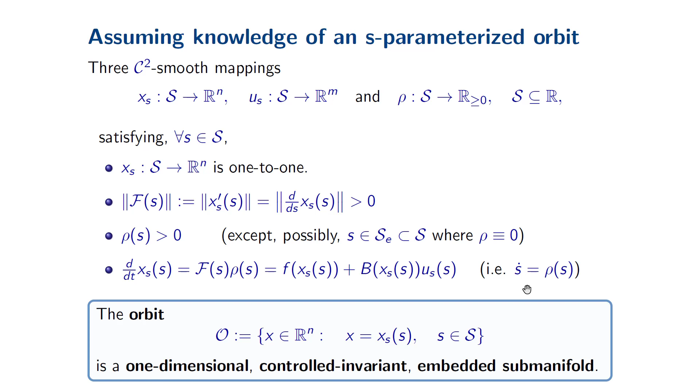Now to just go a bit heavy on the jargon here, this means that this orbit, which is traced out by the curve X sub S, is a one-dimensional controlled invariant embedded submanifold, in general at least. So if we have an equilibrium point, for instance, then it would be zero-dimensional, and it's also possible to have slightly higher dimensional attractors. But for the purpose of the thesis, we mostly just consider one-dimensional types of orbits.

Now the task we will now consider is essentially to generate some forward invariant tubular neighborhood around the orbit in question. So if we have our orbit in black here, we want to generate by feedback this blue shaded region, which is forward invariant, which means that any solution of the system entering into it will remain within it. And preferably we also want to ensure that all such solutions contract to the orbit at a given rate. So exponential is the general case in the thesis.

Now the reason we only consider generating such a tubular neighborhood, so not a huge neighborhood giving a very large region of attraction, is mainly due to the task we are looking to solve. So if you remember from the last video, we had a look at a backflip, for instance, so I'm not claiming that I have solved that problem, but for such tasks, generally having a large region of attraction, something like global stability, does not really make sense. Local is the best one can do.

And if you want to enlarge the state space, it's probably better to add more trajectories filling it out, each with its local controller, generating such tubular neighborhoods.

Now the nice thing with that requirement is that since we know an orbit, we know that this corresponds to some nominal motion of the system, which is consistent with dynamics, does not violate kinematic constraints, go beyond actuator saturations, does not collide, and so forth. Then if we remain within this tube, then we should most likely not violate these constraints either. So having these local controllers, ensuring that the states remain within them, is essentially the perfect way of solving the problem we are looking to solve.

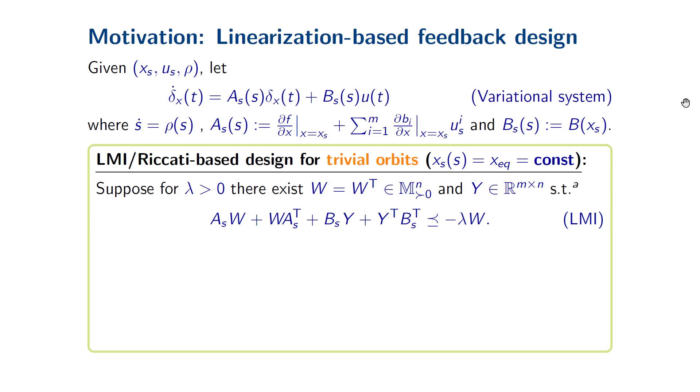E is just the difference between your current state and the equilibrium point, and K is defined from the solution of the LMI. And this feedback for the nonlinear system would render your trivial orbits or equilibrium point exponentially stable. And from it, you can construct a local but strict Lyapunov function for the equilibrium points or the trivial orbits. Now, of course, these are only local results, but they are quite a general procedure which is applicable for a large class of nonlinear systems, and which can provide a seed to utilize other types of methods. You can utilize it to construct a conservative, perhaps, estimate of the region of attraction and so on and so forth.

But this is equilibrium points. What about more non-trivial orbits? What about periodic orbits, for instance? Can we utilize similar techniques? So for one, if we linearize about a periodic orbit, then this would be a linear time-varying system. And to stabilize its zero solution, we would naturally need a time-varying feedback, and this would violate the orbital stabilization problem. And in fact, it also turns out that if we have generated beforehand a feedback which exponentially orbitally stabilizes this periodic solution we want to stabilize, then this variational system's zero solution will not be asymptotically stable.

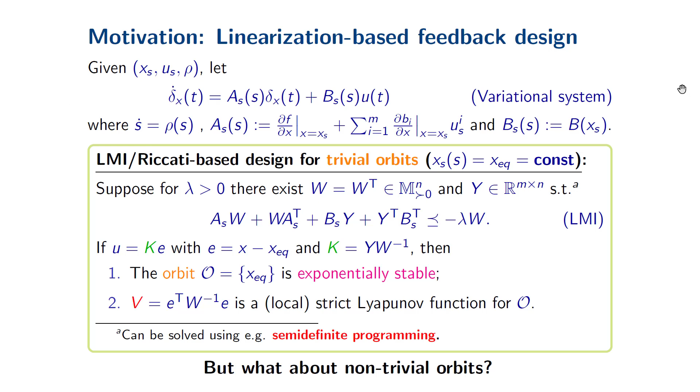I'll only go through this briefly, but essentially this can be shown using, for instance, the Andronov-Witt theorem. So if you design such a feedback that exponentially stabilizes the orbit, then the zero solution of this system will not be asymptotically stable. Only a subspace of dimension n-1, so one less than the dimension of the state space, will in fact be stabilized. But since we want to stabilize a periodic orbit, we must have these directions in our state space which do not contract to a point, and hence this system must have one zero characteristic exponent.

So we cannot utilize this regular linearization to design orbitally stabilizing feedback, at least not directly. So we need a different type of procedure to allow us to utilize similar linearization-based techniques to also design orbitally stabilizing feedback. In order to find such conditions for designing orbitally stabilizing feedback utilizing linearization-based techniques, we need to introduce some concepts. So the first is a so-called projection operator.

So this is a scalar function, generally assumed to be C2 smooth in its domain, and it should satisfy this left inverse property for some S parameterization. The nice thing with this is that using this projection operator and the curve X of S, we can define a projection onto the orbit in question through this composition shown here.

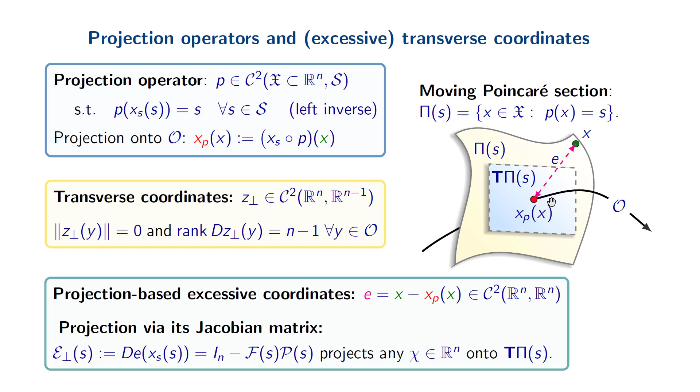But this problem with the excessiveness of these coordinates is quite easy to handle by spotting that if you compute the Jacobian of this E viewed as a function of x and evaluate it at points along the orbit, which we define here as this calligraphic E perp, then it provides a projection onto the tangent space of the moving Poincare section about the point on the orbit. So this blue shaded section shown here. And this we can use to allow us to use linearization-based techniques to design orbitally stabilizing feedback.

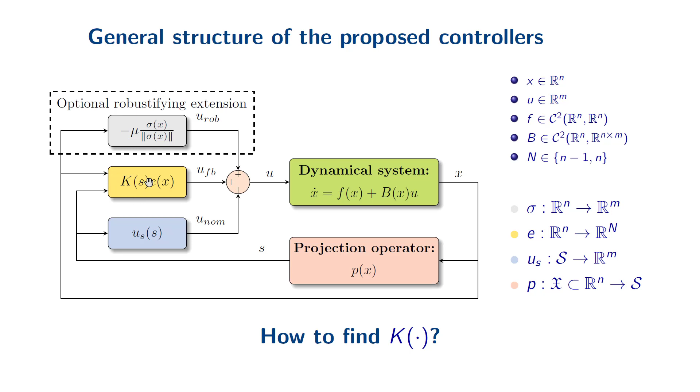The design can construct some sort of feedback to stabilize the orbit, and if we have unknown perturbations or disturbances or uncertainties, we can, as we'll see in the next video, also design a robustifying feedback extension to enhance robustness, utilizing, for instance, sliding mode control. But we will look now at how we can design this K inside here, which ensures exponential orbital stability of solutions. For this, as we mentioned, we are looking at linearization-based techniques, and I should mention we also look at periodic orbits now.

We derive the first order approximation of the time derivative of this variable E. Now, unlike the variational system we saw earlier, which was a linear time varying system, this provides us with a set of differential algebraic equations, as we have this additional so-called transversality condition. This occurs since these are the first order approximation of these excessive transverse coordinates upon a moving Poincare section, which requires that they should evolve upon the tangent surface of the moving Poincare section about the point on the orbit.

Now it's not there just for show. If we in fact removed this equation and only looked at the differential part of the equations, it turns out that this equation is not stabilizable. But it might be with the transversality condition. So if we want to design an orbitally stabilizing feedback utilizing these equations, we need to account for this transversality condition somehow.

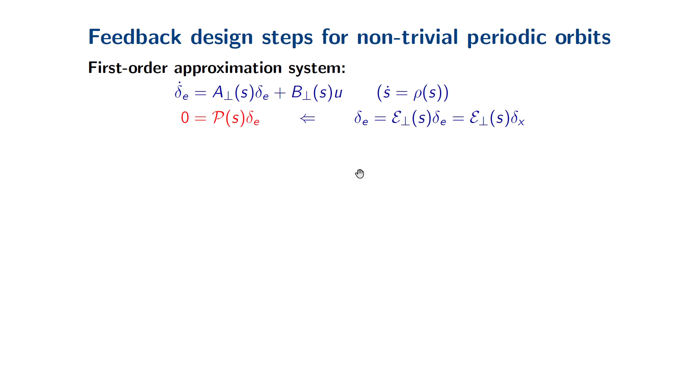But we can utilize this Jacobian we saw earlier for that. So if we have a periodic orbit, much like we saw with the equilibrium point, if we can find a solution to now the projected differential LMI, or for that matter a Riccati-based type of equation, then we can design exponential orbitally stabilizing feedback for the nonlinear system as well.

And the way now this transversality condition is accounted for is utilizing this matrix multiplication here, which essentially means that we only need this equation to hold on the subspace where a transversality condition holds. Where it does not, this subspace we can neglect.

So if we can find such matrix functions W and Y with these properties and having the same periodicity as the periodic orbit, or parametrization of it rather, and we can solve this equation using, for instance, semi-definite programming, then for the nonlinear system again, we can take this matrix function K, defined through the solution of the projected LMI, and we can utilize these transverse coordinates as shown here to design feedback, and it, much like the equilibrium point, will render now the periodic orbit exponentially stable, and it provides us with a local but strict Lyapunov

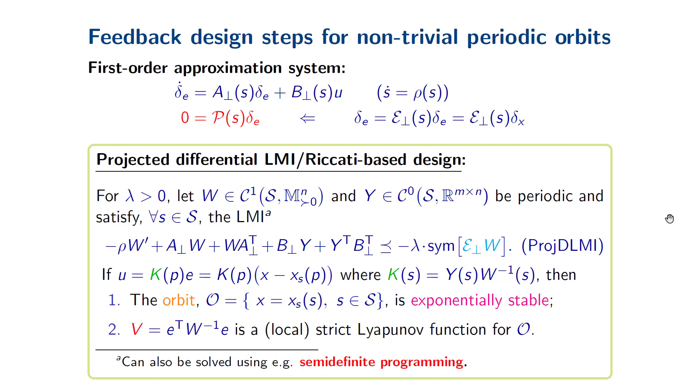function. Again, local results, but methods which are highly applicable to a large class of nonlinear systems, and from which we can build more advanced methods if need be.

Essentially what we have done now is that we found this local strict Lyapunov function. And what if we construct such a tubular neighborhood given by some interior level set of the function? Now, from the conditions on the last slide, we ensured that the time derivative of this function was exponentially decreasing with some upper rate lambda. Now V was defined in terms of the solution to the projected differential LMI, this W.

But essentially, if we did not have any requirements upon W, other than being, say, positive definite, then in a sense this requirement here could be ensured by having the inverse of W going to zero faster than

the variables e. But on the last slide, what we did was we had a periodic orbit, and then due to the closedness of the orbit, we can ensure that this decrease condition ensures, in fact, that we have exponential orbital stability of any solution upon the orbit in question. But if we can then replace this condition of having the orbit closed with alternatives, then we can utilize similar ideas to also design exponential orbitally stabilizing feedback for other types of forced motions as well, not only periodic orbits.

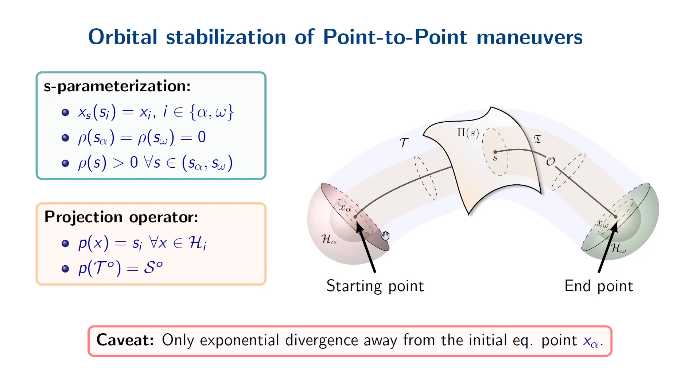Okay. So let's provide conditions for when a feedback of this form will in fact orbitally stabilize such a type of motion, so such a point-to-point maneuver. Essentially what we are asking is, when is it true that the final equilibrium point is asymptotically stable, or that the corresponding orbit, the whole point-to-point maneuver, is exponentially stable? The final equilibrium point is, in a sense, the end point of the orbit, and so it is asymptotically stable relative to this orbit O.

So we can utilize a reduction principle to show that B implies A. So in that sense, we need to only find conditions ensuring that B holds. Now this is not too difficult either. So essentially, if you can find some sort of C1 smooth matrix function L, and some numbers such that this function V, defined as follows, satisfies this exponential decrease inequality for almost all states within some interior level set of this function V.

By almost all, it means essentially that it need not hold on these sections where the projection operator lost its smoothness, as we saw earlier, but it should hold everywhere else. So if we can find such an L, then we can show that for a given k, this feedback will in fact render the orbit exponentially stable.

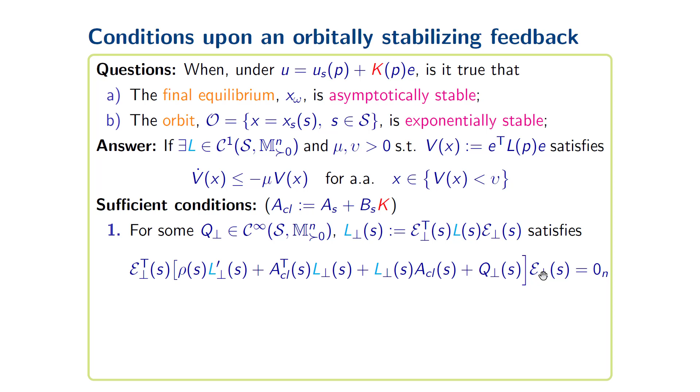Now, sufficient conditions for the existence of this is essentially that we could define this L perp as shown here, which satisfies this projected differential Lyapunov equation, projected due to these Jacobians we saw earlier on, multiplied from both sides, so we only look at a particular subspace, and this L also satisfies at these boundaries a pair of algebraic Lyapunov equations, shown here.

Now these are such that if we, for instance, took this P and fixed that it only projected onto a point corresponding to one of the equilibrium points, then these solutions to these algebraic Lyapunov equations would ensure that this would render this corresponding equilibrium point locally exponentially stable. So essentially we take a controller which merges these controllers which render each equilibrium point locally exponentially stable, together with a controller which stabilizes the transverse directions in these tubular neighborhoods, and we do so continuously through the projection operator.

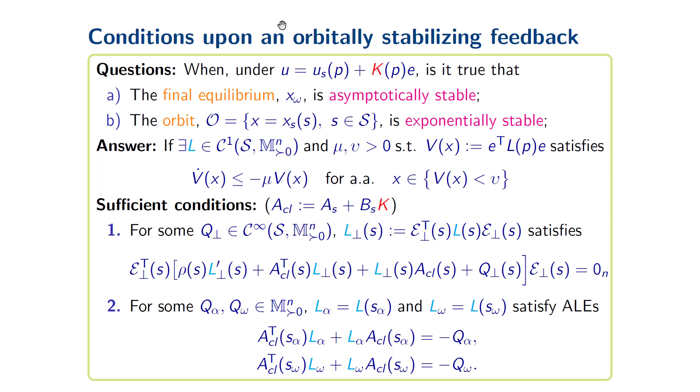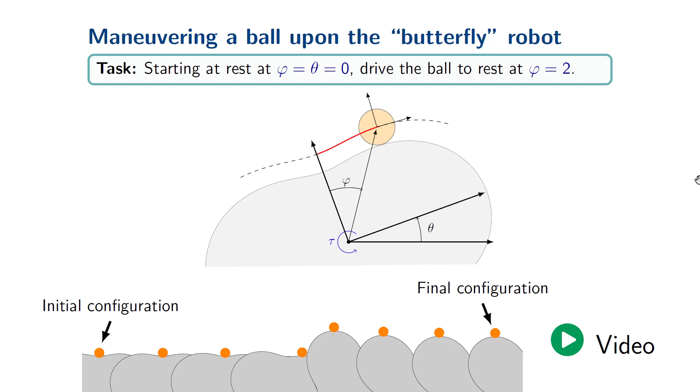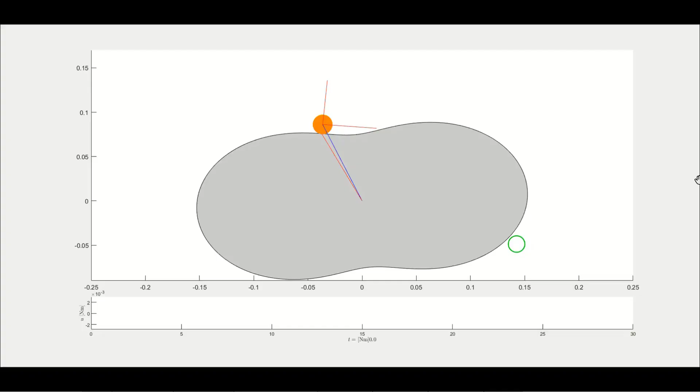So let's look at some simulation results. We have also had some preliminary experiments, but some equipment failure has not allowed us to show full working experiments yet, but hopefully soon. So we see here it swings up the ball to the desired position without it departing from the frame. And you can also add some perturbed initial conditions, uncertainties in the mass of the ball, some disturbances and noise and so on. It still works pretty well.

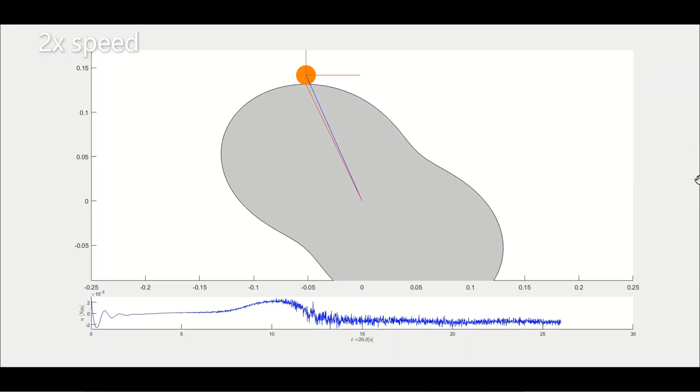Okay, so this was orbital stabilization of point-point maneuvers. Now let's have a look at stabilizing periodic orbits of hybrid dynamical systems. A hybrid dynamical system is a system which has phases of continuous dynamics together with regions in the state space in which the states undergo these discrete jump events.

So in our case, we want to have an orbit which, starting on one of these switching manifolds, sigma sub plus, at the point xa, the states evolve along a predefined orbit, then hit the corresponding switching surface sigma minus at the point xb, and then are mapped directly back to the point xa through this jump map. Now the methods also allow you to have a certain sequence of such jumps before you have a closed jump taking you back to the start point. But for the purpose of simplicity, we only look at this single loop shown here.

Now again, we need to make some updates to our s parameterization, so this curve x(s) should correspond to these endpoints, A for after and B for before the impact, before the states hit the switching surface and are mapped back. This time we have no equilibrium points, so rho should be strictly positive, and we also want these transversality conditions to hold, in the sense that we do not want the orbit to have a grazing impact. So we want to hit the switching surface with some non-zero angle.

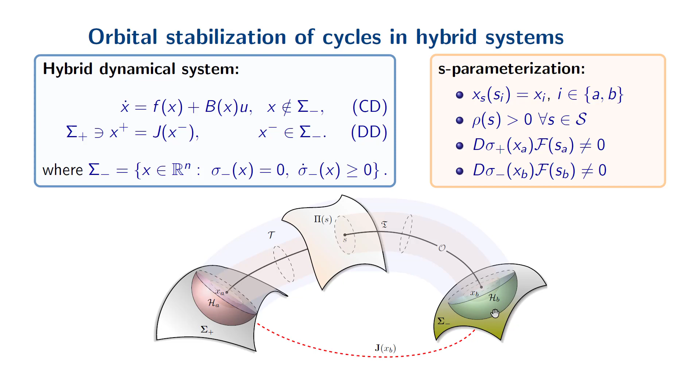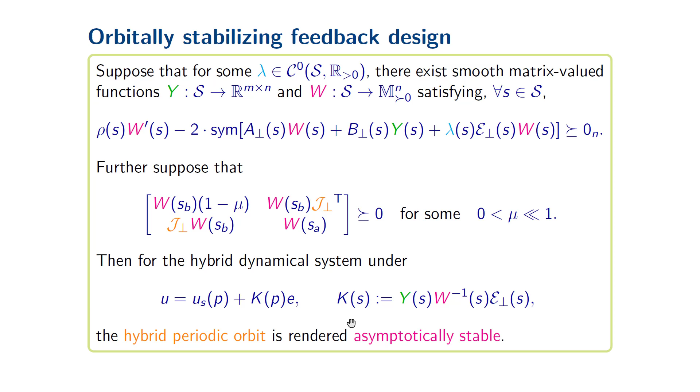So with this jump map matrix, J_⊥, we can state a statement quite similar to what we can use for point-to-point maneuvers. We have some projected differential LMI as shown here, together with an additional condition to account for these jumps at the end of the cycle. If you can find solutions, W and Y, satisfying this specification for some very small mu, then this feedback shown here with K defined will render the hybrid periodic orbit asymptotically stable.

Let's look at a simple example, stabilizing symmetric gaits of a biped robot. So we have generated a stable and energy-efficient walking gait, here walking with a step length of half a meter. Now this three-link biped has 3 links, but only one actuator between the legs mounted at the hip. To account for this low number of actuators, so 2 degrees of underactuation, we have added a pair of linear springs between each leg and the torso.

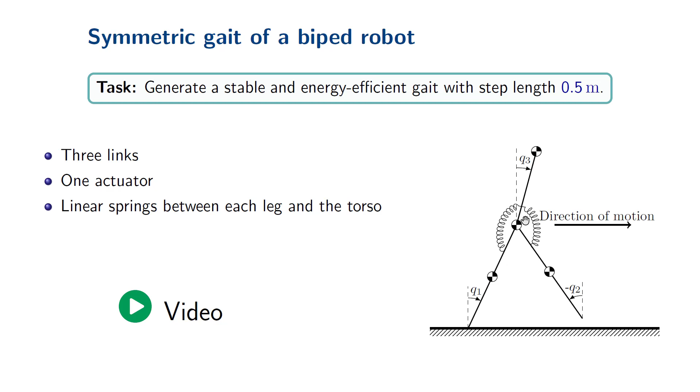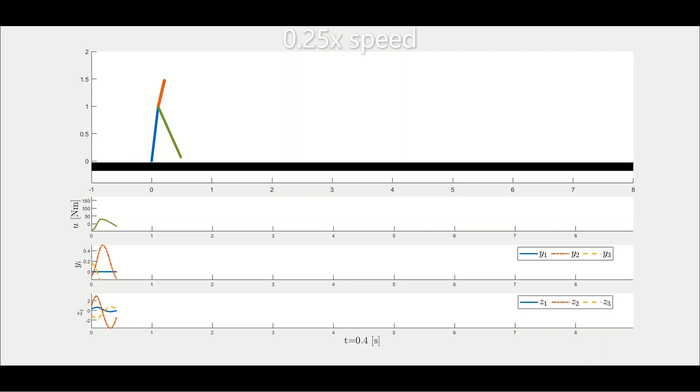So next we'll see the orbital stabilizing feedback. First we start with perturbed initial conditions, so this is in closed loop. We see that it gradually swings in and, after a few steps, settles onto the desired gait. And keep in mind it has only this one actuator. But if we start with different initial conditions, even though it manages to settle down and converge to the desired orbit, we get this large spike here, so it has some sensitivity with respect to initial conditions or perturbations.

But by just adding saturation, we see that it can still handle the same initial conditions and still manages to stabilize the gait, even with these quite restrictive saturations. And we have also shown in simulations that it is quite robust to uncertainties in system parameters and the like.

Okay, so in the next video we'll have a look at robust orbital stabilization utilizing sliding mode control.